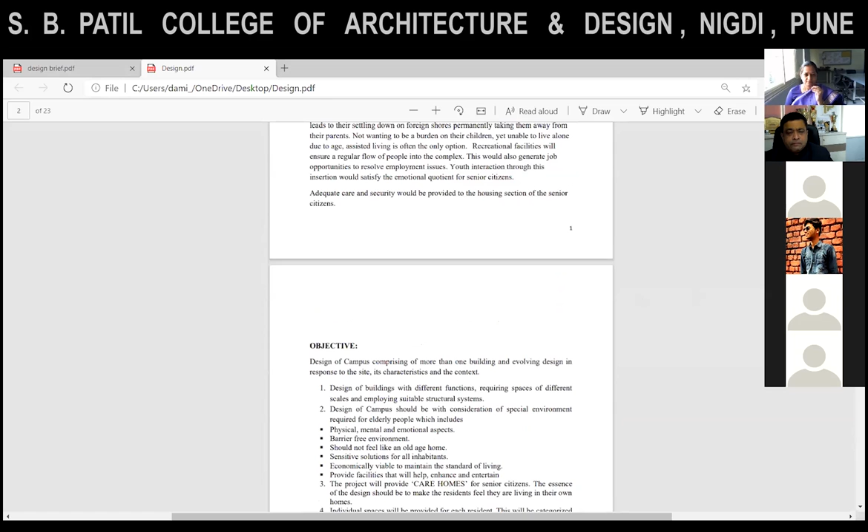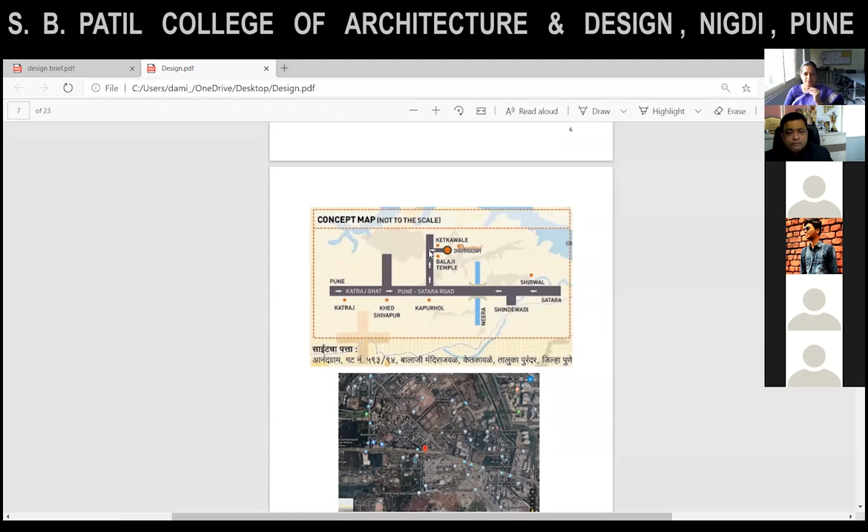Hello, good morning, Radhika ma'am. So I'm Damini from fourth year B section. I would like to present the current design project that we are working on. Our topic is assisted community living. For our site, we've been given a site in Ketkawale, which is approximately an hour from Pune. The site is a very secluded area, it is pretty calm, it is near the Pune Satara road, and there is an off lane which takes you to the main site.

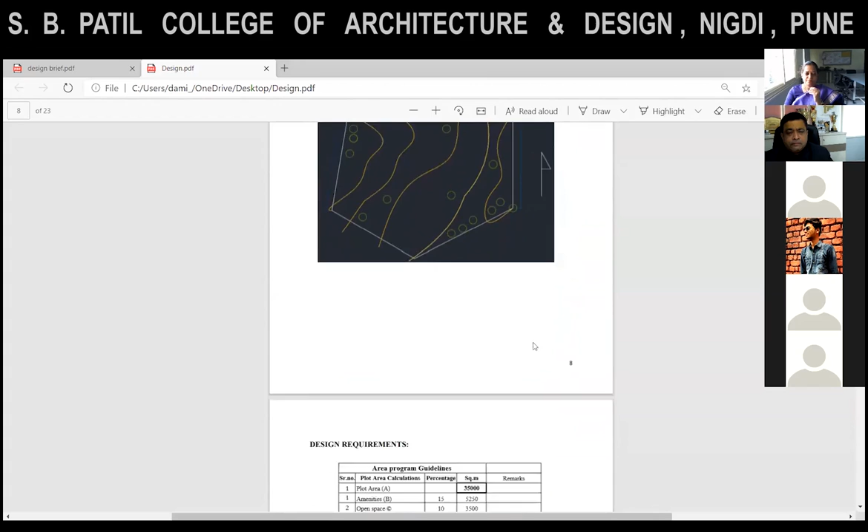This is the main site which we were given. It is a contoured site, and there is existing vegetation of mango and banyan trees on the site. These are the design requirements that we were given. We have been given building typologies of detached row houses and apartments of 1 BHK, 2 BHK, 3, 4, and 5. Along with that, we are supposed to give commercial spaces of shops and offices, and an amenity space of 5,250.

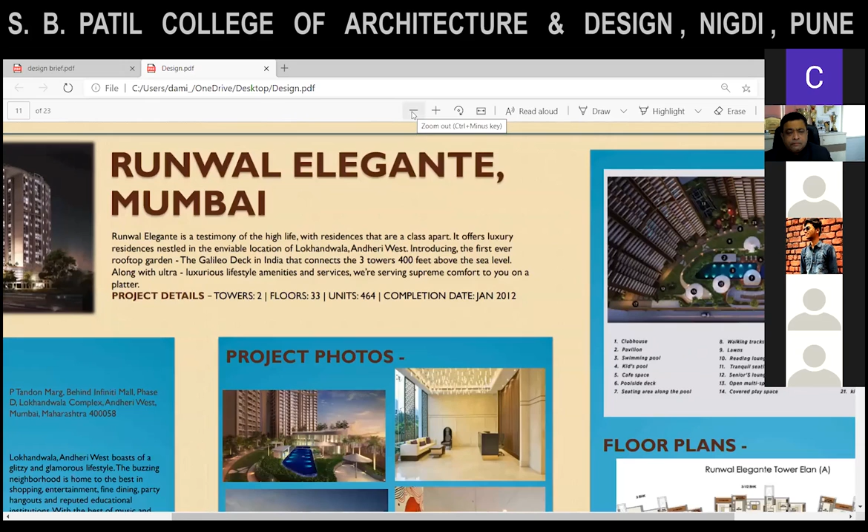Ma'am, I'd like to start with my case studies that we did. So the first case study that I did was on Runwal Elegante in Mumbai. So the location is Lokhandwala, Andheri. So the area of this site is pretty posh, but at the same time, it needs to be a little cost effective. So this building, the reason I selected it is because I am from Mumbai and I've always seen this building, and I wanted to do a deeper study in this building.

So one feature that I always liked about this building is that they have provided a Galileo deck sort of a thing which connects all three buildings on the terrace, and they have given the clubhouses and amenity space right at the center. The building orientation is such that the direct sun rays do not enter the playground, so that when children are utilizing the space, they are not hit by the harsh sun rays. The building leaves a shadow.

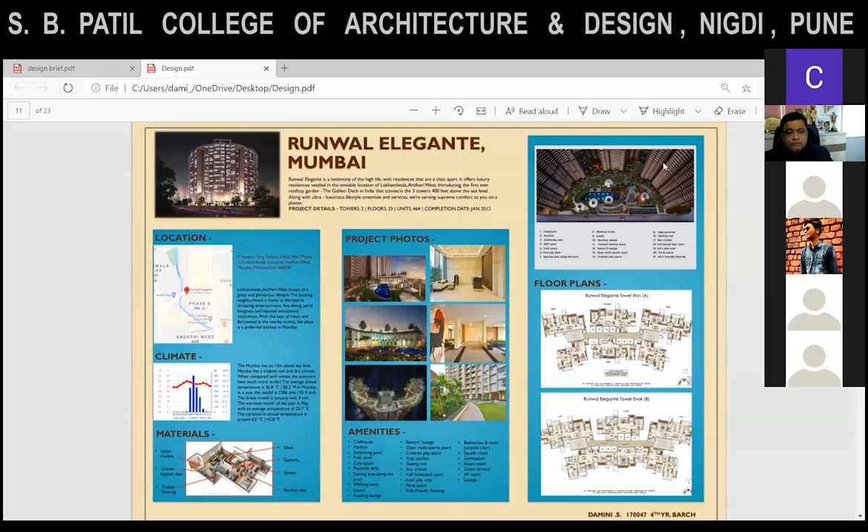So these are the plans that I have provided. They have luxury apartments of 1 BHK, 2 BHK, 3 BHK, 4.5 BHKs, and 5 BHKs. These are the plans that I have provided.

Then there was a second case study that I did, which was Sky Green Residential and Retail Tower, which is in Taichung City in Taiwan. This is more biophilic and green architecture, which is the reason why I selected it, because for my project I wanted to do something which incorporates the environment, the site context of our site. In this building they have provided a common terrace on alternate floors, and if you can see this image.

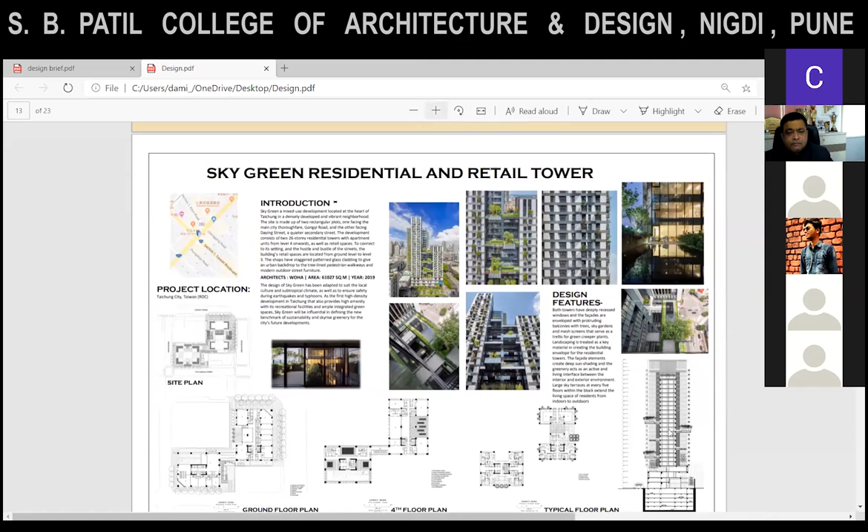Yes, go ahead. Yes, ma'am.

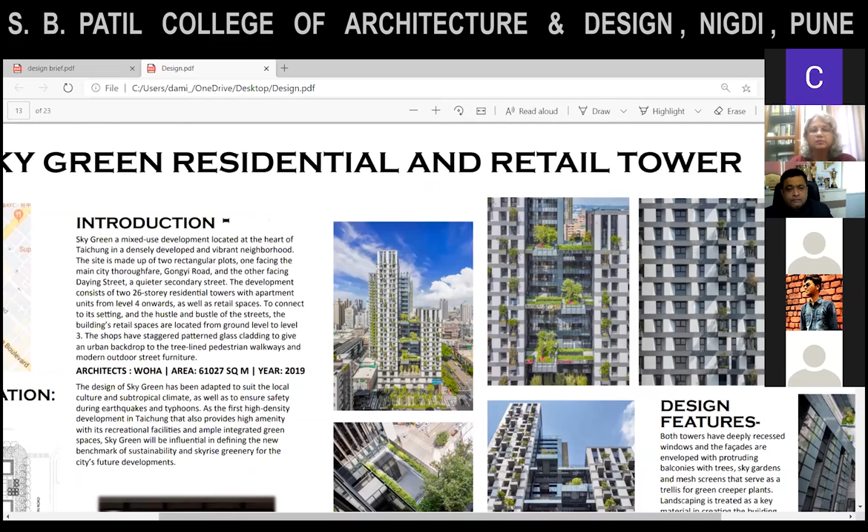And they have given a terrace with individual balconies, in which also there is plantation and landscaping done. And for the sun rays, they have done an elevation treatment, which is seen over here, so that the sun rays do not enter the building directly.

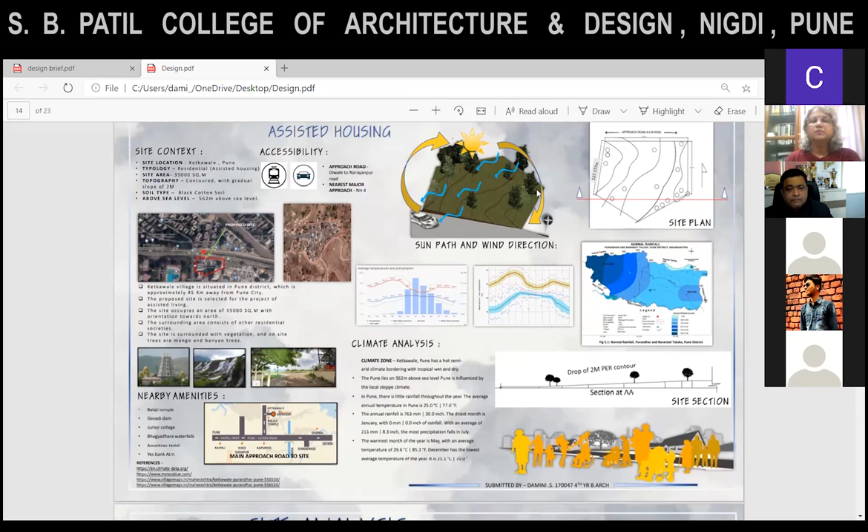Then the site has a contour from west to east. These are the images that I have provided. So this is our site, and these are the nearby amenities with approx locations from the site. And you can see that you have the main views in the north-east and south-west locations of the site, and this is the entire mountain region that is covering the site. So the site has a lot of potential for great views.

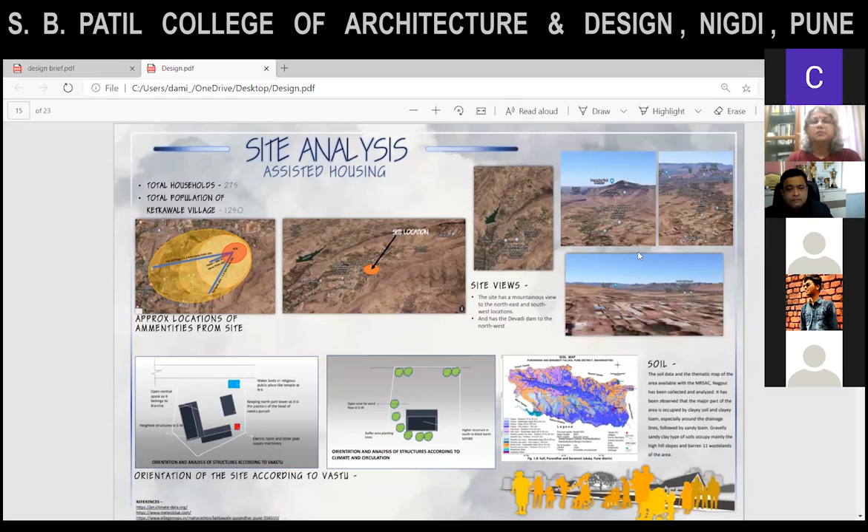This is the site. We have done an orientation according to Vastu. So the main buildings are placed in the southwest area, but keeping a little bit part open in the southwest for the wind direction, for the wind to enter.

And so my concept was, since it is assisted living, I wanted to create interactive spaces for everybody living there, because in assisted living there are specially abled people, and their mindset is that even though they need assistance, they want to feel that they do not require any assistance. They try to do everything by themselves. So the design thought was that it should be compatible for all.

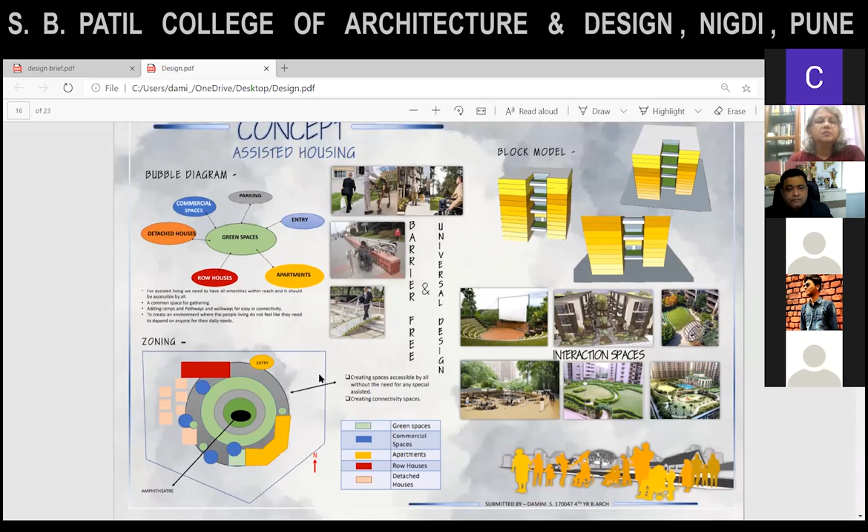Yes. So this is the basic bubble diagram that I had done. I have given the apartments on the lower portion of the contour, and then the detached and the row houses on the upper portion of the contour, so that the detached also can get the views. Then the zoning that I have done.

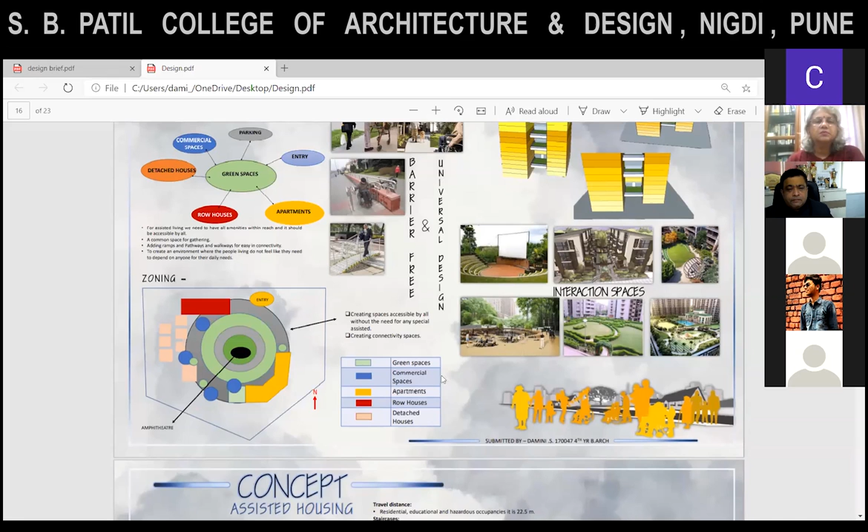So in the center, I have given the green space and the common interactive spaces, so that it can be accessible by everyone. And along with that, in assisted living for the specially abled, they do not have so many varieties of activities that they can do. So the spaces that I want to create would give them like an inspiration, like we can go and do this, so that is why I had created these spaces. So this is the DCR rules and norms that I had removed, and this is my area statement.

I have combined 1 BHK and 2 BHKs in one apartment in one building, and there are four types, and then 3 BHKs, 4 BHKs, and 5 BHKs in one building. Okay. Yes, ma'am. So there are total 6 buildings. There are total of 6 buildings, and we have a height restriction of 30 meters. So I've given 9 floors of 3-meter height.

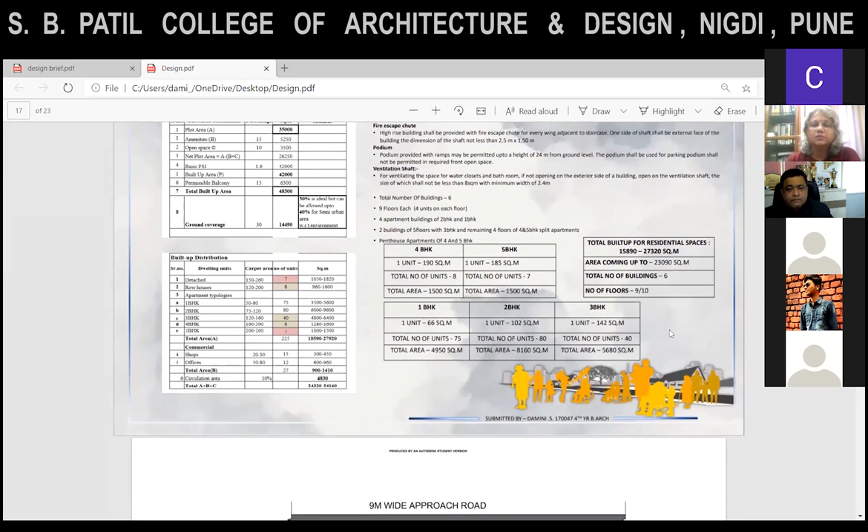Okay. Yes, ma'am. So this is my site plan. I've given an entry from the north side, and there's a separate entry for the apartments and for the detached and the row houses. I've given the road in the periphery of the site, so that anybody who is utilizing the spaces inside is not interrupted by the vehicular movement, and so that the entire circulation would be only pedestrian, and there is no risk or any scare for

the people utilizing it. So I've given the main open space or a garden sort of a place in the center. So it is accessible by everybody and it can be viewed by everybody. At the same time, this is at a height, and below this would be the basement parking for the buildings, which will be accessible from this area. So there is no vehicular movement on the site in the center.

And also I have... Okay, go ahead. Yes ma'am, also the vegetation which was on site, I have tried to not disturb that, so that is the reason why I have sort of given a setback.

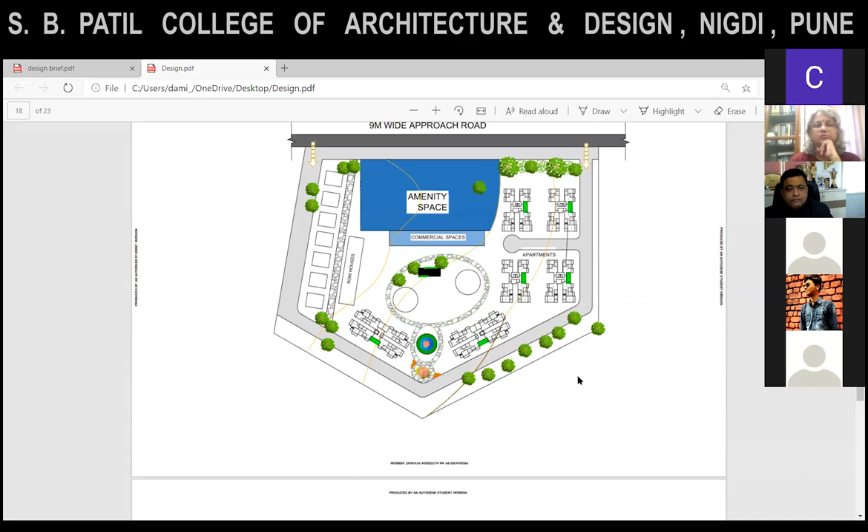Okay. Yes ma'am. So these are my floor plans. This is the row house floor plan. I've given an individual car park for each of the row houses, and the row house is G+1. So this is the main living entry. I've given the living space here so that it is a private space for anybody who wants to view the television. Then the kitchen is an open space, and then there's a guest room and the common toilet.

And then on the first floor, this is just a family gathering space, and there are 2 bedrooms on top, and this is the open terrace which will be provided. Okay. And then going ahead, this is my 1 BHK and 2 BHK floor plan. So these are the open terraces, common terraces that I have provided on each floor. These are the spaces where the people of the floor can come and just gather. This is something that I had taken from my case study.

So I've provided 3 lifts and the fire staircase and the staircase. For the 2 BHK planning, I've given the living space, the kitchen, common toilet, the bedroom and the master bedroom. For each room, I've given a balcony with a French window, which is going to be facing towards the views of the site.

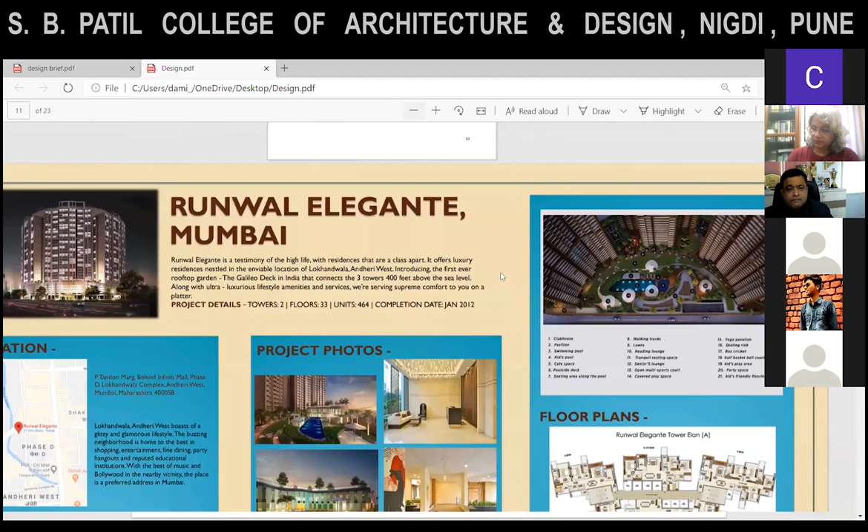Yes, ma'am, that's all. Okay. I have a few questions. Yes, ma'am. First, because I could not read your charts, what is the plot area and what is the FSI to be consumed? Yes, ma'am. The total plot area is 35,000 square meters. Okay. And the FSI that we've considered is 42,000, 1.6. 1.6? Okay, 1.6 times. Okay.

Have you checked whether you have consumed that much? Yes, ma'am, I have. So the permissible built-up area is 42,000, and so far I still have to work on it. My total built-up is coming to approximately 20,000. I still have to calculate for the detached because I've not completed that yet. Okay. So that is left.

Second question is, you have left 10% open space and 15% amenity. Yes, ma'am. Okay. Now my comments would be such that the 15% amenity is to be handed over to the government, right? Yes, government, ma'am.

The location of when you are doing the subdivision of the plot, see, in a large plot, whatever proposal we give, it is a subdivision of plot because you are dividing the plot into an amenity plot, an open space plot, and the remaining is the residential plot, correct? Yes, ma'am. So it is a subdivision.

So you should select an amenity plot or locate it in such a way that it gets maximum potential, but also see, from the road you are not able to see your buildings at all. So is it something that you want like that? Then it's fine. Otherwise, you have to consider that your residential project also gets prominence along with the amenity plot.

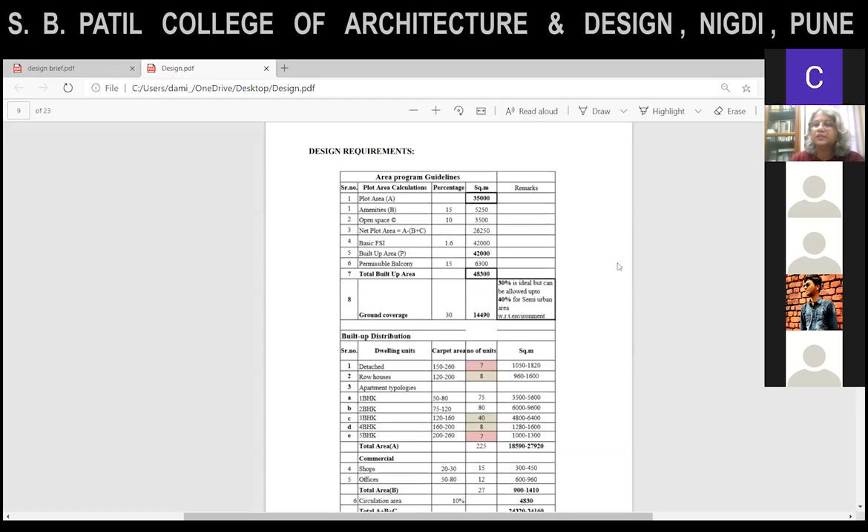Hello. Yes, ma'am. You can hear, no? Yes. Okay.

In this there isn't much of a passage which is wasted, but in the bigger apartments, as you go to 3-bedroom and 4-bedroom, you will realize that there are longer passages. So take care of that, because the second reason is the passages become dark. They don't get natural sunlight.

Now in this case on the right side you have the 2-bedroom apartment. In front of the door of the passage of the master bedroom, right exactly in front, if you put a window, maybe a smaller window, then if the door is open, at least you will get some cross ventilation. So over here, if you put a window, you will get some kind of light and cross ventilation. These are small things.

Secondly, have you checked the shaft sizes for light ventilation? Yes, ma'am. My shaft size is 1.5 by 2 meter. How much? It's 1.5 by 2 meter.

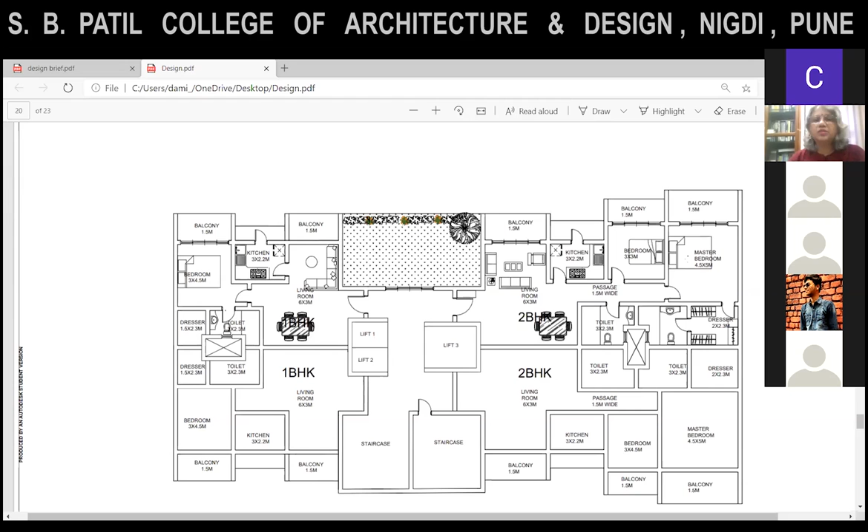And as I told you, you have not made use of the corners. And another apartment also I saw, in the 3 and 4 bedroom, the bigger apartment. Can you show that? This is 3. Yes, ma'am. So you can see that so much of the area is in the passage. So what happens is, when I'm buying an apartment, I'm paying for every square foot. So if you calculate this area, maybe you can get one more bedroom. Understood? Yes, ma'am.

So what am I paying for? Am I paying for the circulation area? So that's why you should avoid long passages. You can definitely reorganize this. Okay. Yes, ma'am. And see, there is a grid there. I can't see a clear grid.

In a basement, you need to have driveways within the building. So the drives are suitable sizes, and understand that you have RCC walls around the lift. These are walls which also can act as columns. Yes, ma'am. So you can take advantage of that.

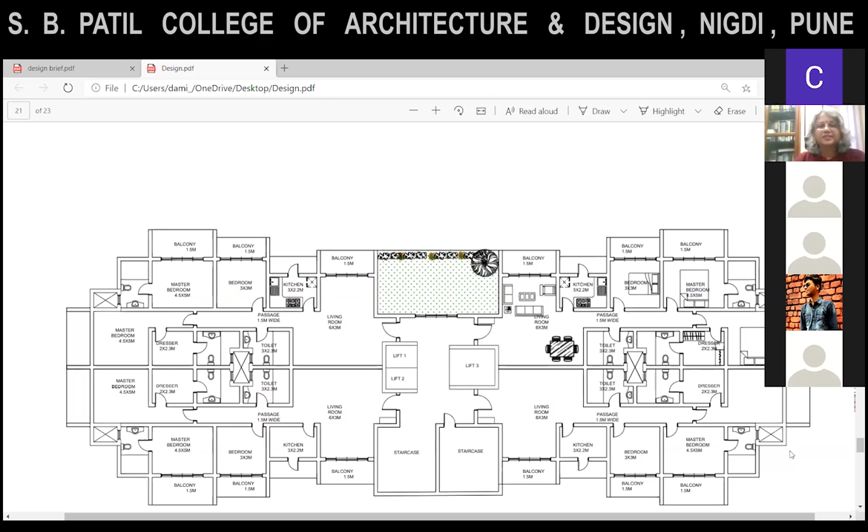Otherwise, it is a very good attempt, I would say, and I'd like to congratulate you for that. Thank you, ma'am. So the things which I appreciated was your thinking in the master layout, also the way you have put your driveway on the external side. There are some aspects which you will further work on, because you have yet to think about the services, the ramps and levels, because it's a sloping site. You have to work out the levels, and you must take advantage of the slope to work out the ramps. Yes, ma'am.

So you can also plan the entries. As I said, you have to plan whether every time a pedestrian would go to the basement and then take the lift, or if I can straight away enter the building from the garden at the ground level. So these kind of entries you have to work out. If I have to go to the garden, how do I get to the ground floor and go out into the garden? Or do I have to go to the basement, then go up the ramp and then enter the garden? So these kind of pedestrian entries are also important, right? Yes, ma'am.

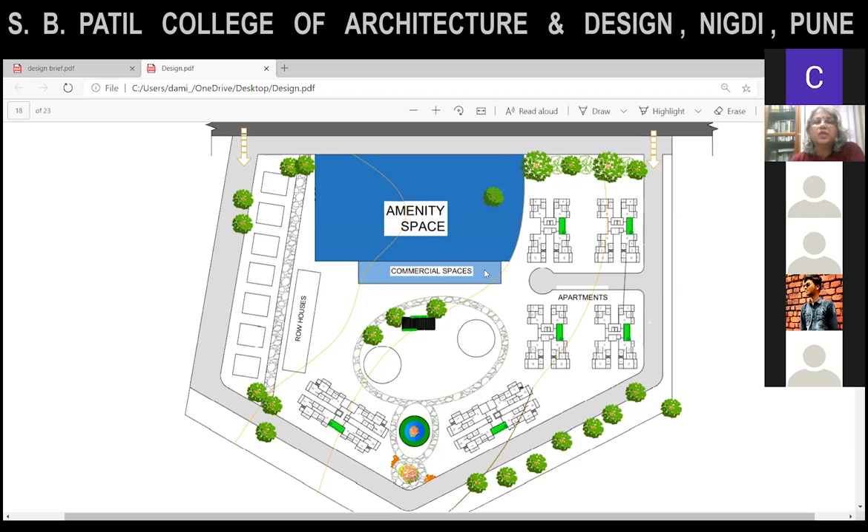You know. Yes, ma'am. And that is why actually I gave the amenity space connected to the main road so that it is not going to interrupt the internal layout. I understand, yes, but the commercial spaces should be available to these people as well as outside people, so that they get better business. They have to get business, and if I am the promoter and I have to sell these shops, it will be very difficult for me to sell these shops because they are not on the main road. You understand? Yes, yes, ma'am.

So shops are always fronting the road, the main road, so that these are available to the society as well as to the outside. So that is another point. Okay. Yes, ma'am. I'll work on all that.

In data collection, firstly, we have studied the typologies of houses, which are mainly row house, detached house, semi-detached, duplex, apartments, penthouse, traditional wada, skyscrapers, villa. And further, I have studied two case studies: one is Lodha Belmondo and second is Puneville, which is located at Pune. The reason behind choosing this case study is that I can easily relate it to our proposed site,

which is at Rawet, and the data analysis from this case study helped me in site context, and also brought me closer to the bylaws followed by the PCMC. Next.

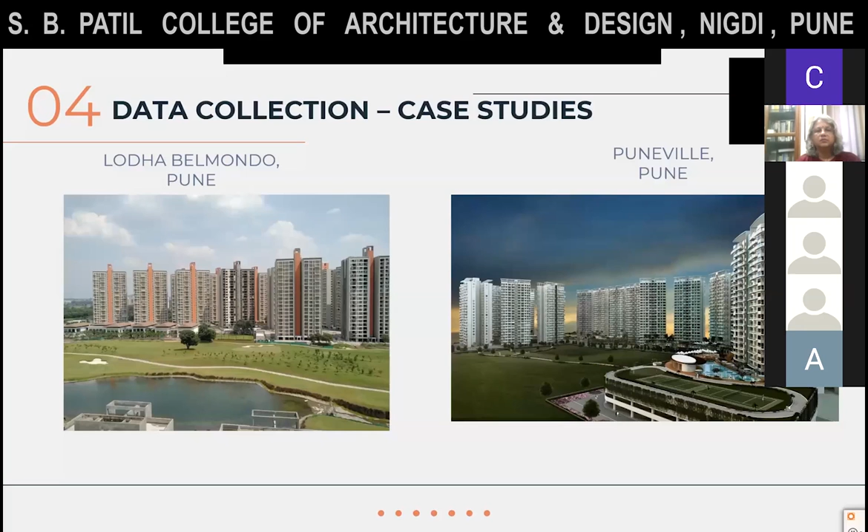Hello. Yes, yes, go ahead. Hello. Yes, yes, you are audible. Yes, ma'am.

Site analysis. As our site is located at the Mukai Chowk in Rawet, the actual owner of the site is Lalwani Builders, and the total site area is 30,000 square meters. According to the DP of Rawet, our site is currently situated in a residential zone, and it is surrounded by the commercial zone, giving an advantage of amenities such as hospital, market, restaurant, and bus terminal. As the site is also close to an IT hub, it has many advantages further.

Hello, Aniket. We can't hear you. Hello, ma'am. Earlier things we missed, whatever you said. Hello. Now you are audible. Yes, ma'am. Go ahead. Next. Hello. Yeah, go ahead. Ritesh, next. I have done.

So my concept is co-living, as our main aim was to design assisted living. So I have divided co-living in four categories, that is community, collaboration, convenience and COVID. As for community living, the basic definition of community living is people living together but in their private homes, or one can say a group of people living in private houses that are gathered together. In community living, I have considered all ages.

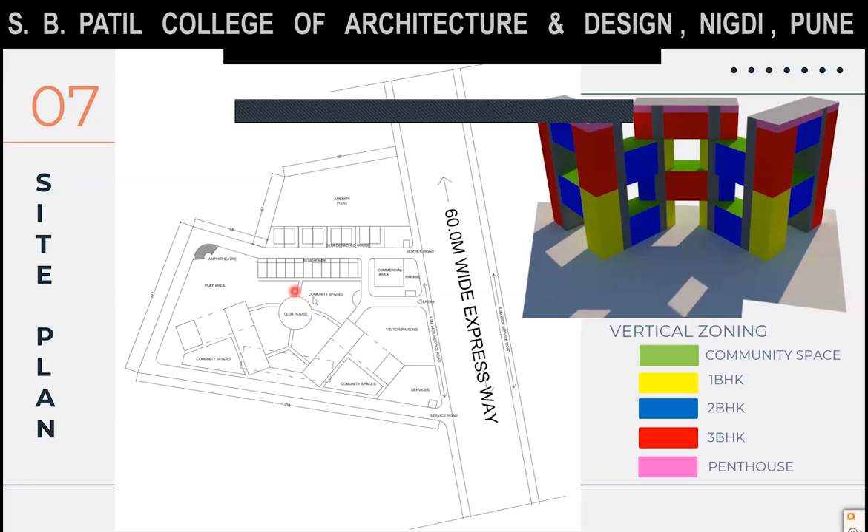Yeah, go ahead. Go ahead, Aniket. Hello, ma'am. Yeah. Hello. Yes, go ahead. Yeah, continue. Am I audible? Yes, yes, continue. Okay.

I have placed services at the end point, so they are easily accessible by others, and it will not disturb the internal layout. Further, at the front side is a 60-meter wide road, and all three sides are residential units. So in future there are chances of buildings and apartments. So I have tried to create more internal views rather than external. So if in future there is any high-rise building near our site, it will not

Aniket, you are not audible. Hello, Aniket. Hello ma'am. Hello. Continue. Yes, ma'am. Ritesh, next. Wait. Back. Site plan. Yes, ma'am. Hello, am I audible?

Ma'am, my work is pending for the penthouse, 3 BHK and 2 BHK for other levels. Yes, it is in process. So Aniket, I'll give you the comments. Can you hear me? Yes, ma'am. Okay, so in this plan also, I really like your effort because you've thought of something different than usual. You have designed the apartments also very nicely. The only thing is the core design, as I told you, you take care of the staircase.

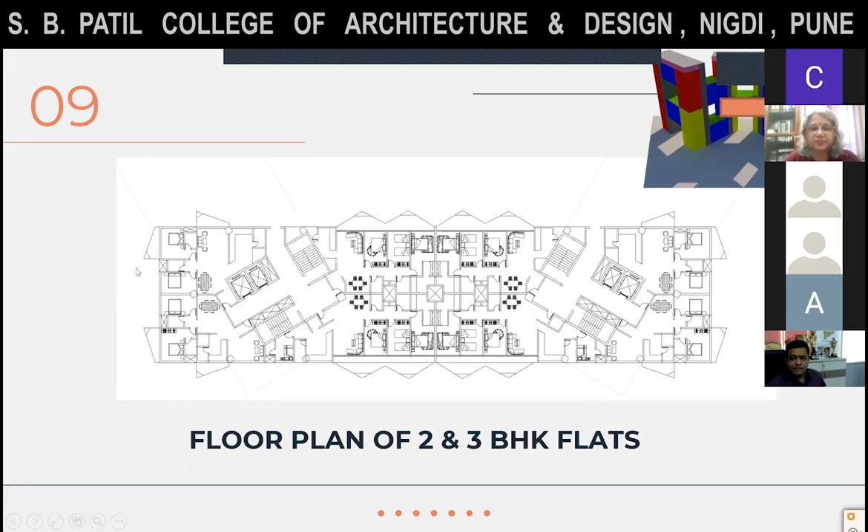Can you go to the layout? Which layout, ma'am? Your site plan. Site plan. Yes, ma'am. Okay. I want to appreciate your site plan because I think you have thought of different aspects in this. There is a clear cut circulation pattern for the vehicles and the pedestrian pathways. So I like that. Secondly, I like the way you have thought of vertical zoning.

Only thing is, I think your commercial area you have not detailed out whether you want it as a multi-storied building. Yes, ma'am. It will be G+2. At the ground floor, all shops will be there, and above 2 floors will be offices. But right now you don't have an idea how many shops you can accommodate in that. We have given a 10 shop requirement. So you don't know whether 10 shops will get the frontage of the road. So maybe some of the shops can face the internal road.

Because maybe all cannot face the 60 meters, the 12-meter road next to the expressway. There's a service road, right? Yes, ma'am. So some of them may face the service road and some of them may face your internal road. But ideally, we should think of shops which will have a good frontage. Yes, ma'am. You've also allocated an area for services. That is also something I like. So overall, I think your layout is pretty much worked out.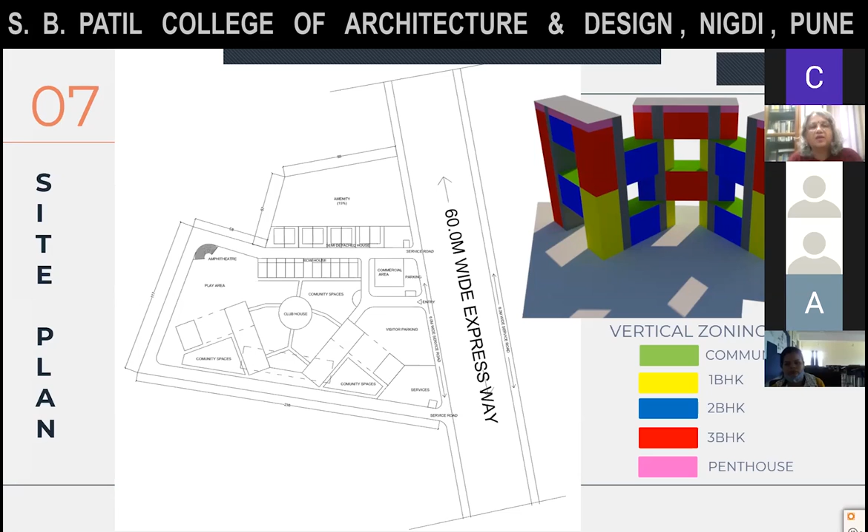Yeah, so the general comment I would like to give is that you have done good case studies, and basically the topic given to you is assisted housing, which does not mean that people staying there are dependent on anybody. In fact, we want them to be as independent as possible, and that is the way you have to go ahead. I'll just start with my presentation so that during the question answers, you can ask me more questions about anything specific. Yes, madam. Okay.

Yeah, can you see the screen? Yes, ma'am, but not the presentation. You can't see the presentation? No, we can't. Only the screen sharing is there, but the presentation is not visible. Okay. Now? Not yet. Give me a minute.

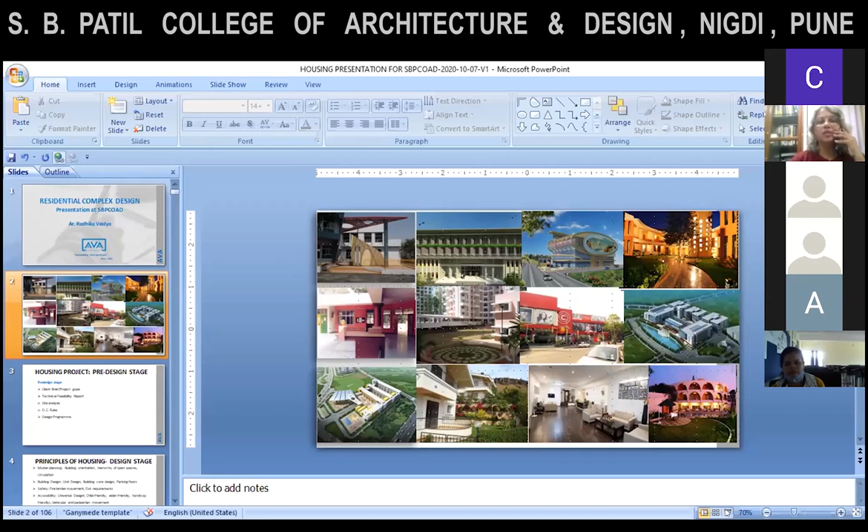Yes, ma'am. Now it is visible. Hello? It is visible. No problem. Hello? Your presentation is visible. Can you hear me? Okay, wait here. Hello, can you hear me? Yes, ma'am. We can hear. Akshata ma'am, are you able to hear me? You are able to hear me? Yes, madam. Okay, thank you so much. Sorry for the break. No problem. Okay.

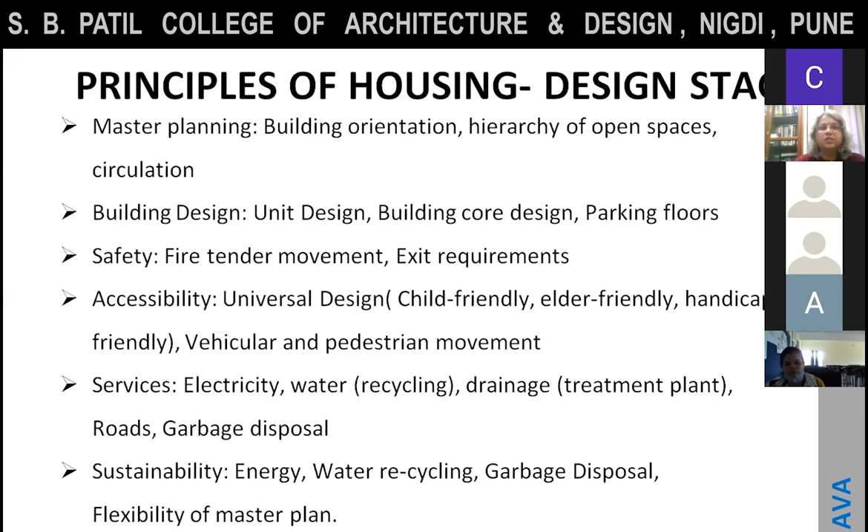So what is a sustainable project? I would say either the 3 E's or the 3 P's. So environment or the planet, you have to cater to. Equity or people means, as I said, if it is people oriented, child friendly, elder friendly, your project is designed considering people of all ages, then you have achieved equity for the people. And thirdly, economy.

That is, it should be an economical project, or it should bring prosperity to the project proponent or the builder or proprietor, as well as the buyer. So from the buyer's point of view, if I have a resale value for my apartment, whether I'm going to stay there permanently or I'm buying it as an investment, it should fetch me good returns. So all these three aspects become very important while designing a residential complex.

So there are 9 projects which I'm going to share with you. I hope I have enough time because I have to cover many aspects in this. Yes, madam.

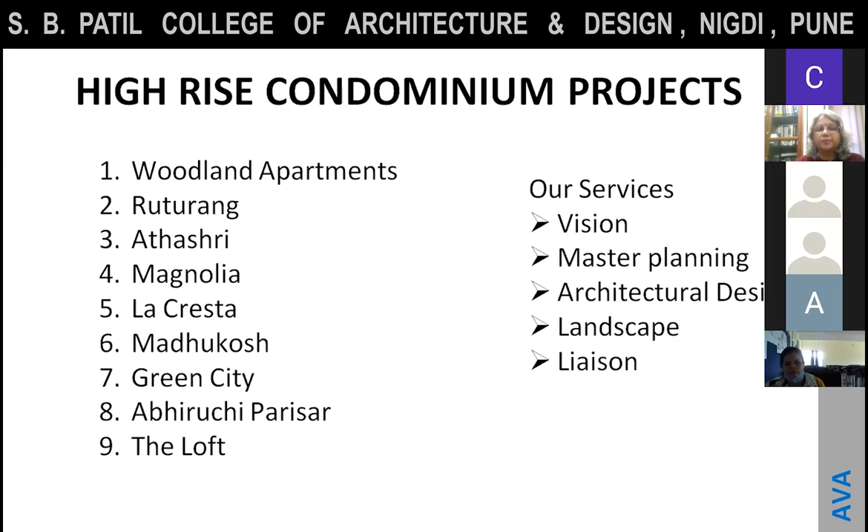So the first project is Woodland Apartments. This was, in fact, the first 36-meter tall building in Pune, when the DC rules had changed. Before this, the building height allowed was up to 20 meters. And when the Pune Corporation changed the DC rules and started allowing 36-meter buildings, this was one of the first buildings to get sanctioned.

So this is the Google plan of that. And why I have drawn this is, this actually comprises 2 separate plots which belong to 2 sisters. We had first got this plot in possession, and this was under negotiation. But we were still working out a master plan for the entire land. So we started with these 2 buildings.

This is located behind Cummins in the Kothrud area, and this was quite a secluded area. Now you can see so many buildings around, but at that time there was nothing in this area. So this plot we allocated for the commercial essential shopping and constructed these 2 buildings. At that point of time, the current rules of alternate level terraces were not there. So we played with the balconies, turning them at right angles at different floors to create an interesting elevation and to create terraces as well.

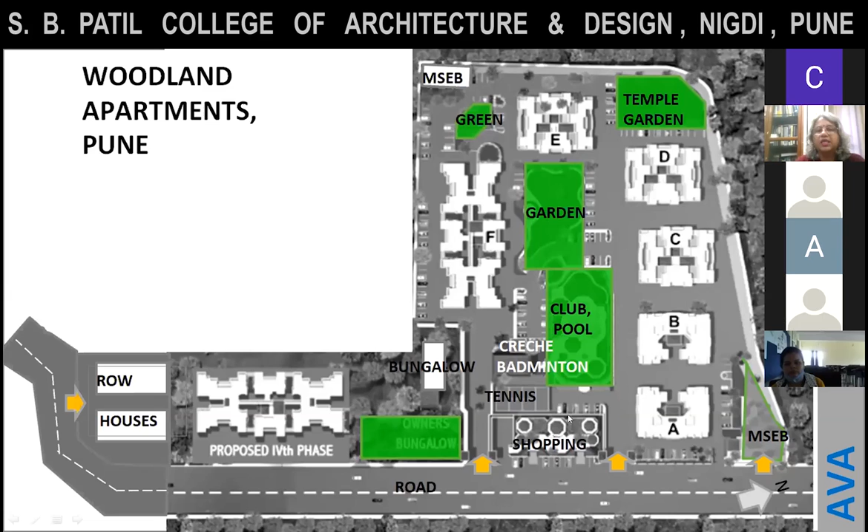The next one is Ruturang. So when this plot was bought, this was a proposed road, and we had to actually construct the access road before we got the completion of this project. In the meanwhile, during construction, we had this existing access to the project. And again, in this plot also, we had a number of trees. Maximum trees were in this part, so we decided to put the open space here so that we don't cut trees.

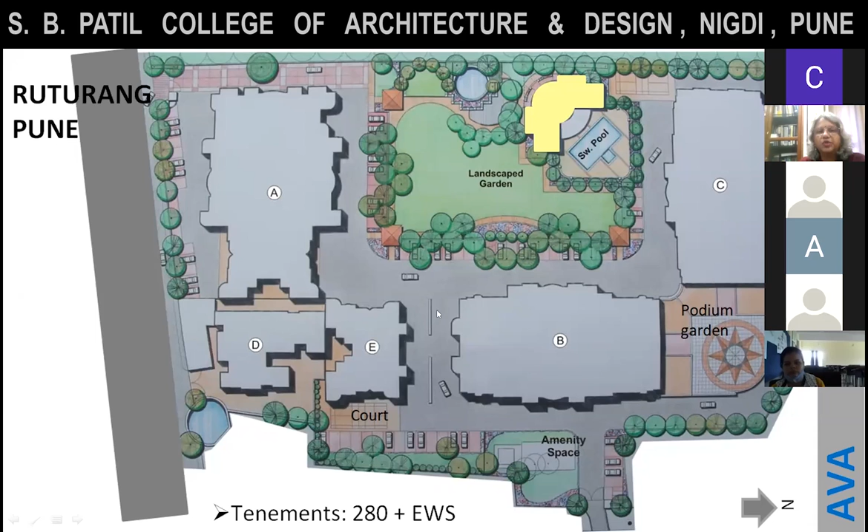After many years, we got an additional FSI. So we added a small building here with 2 apartments per floor. And each of these buildings have 8 apartments per floor. And you can see the core design in the center.

In those days, high rises or 36-meter buildings were new, and the rules for the fire norms were not clear, and only one staircase was required. Later on, the norms have been changed to 2 staircases per floor, with one staircase having an external side. Now here you can see this staircase is inside, but it has a proper big duct ventilating it. So even if the second staircase is inside, it has to be properly ventilated.

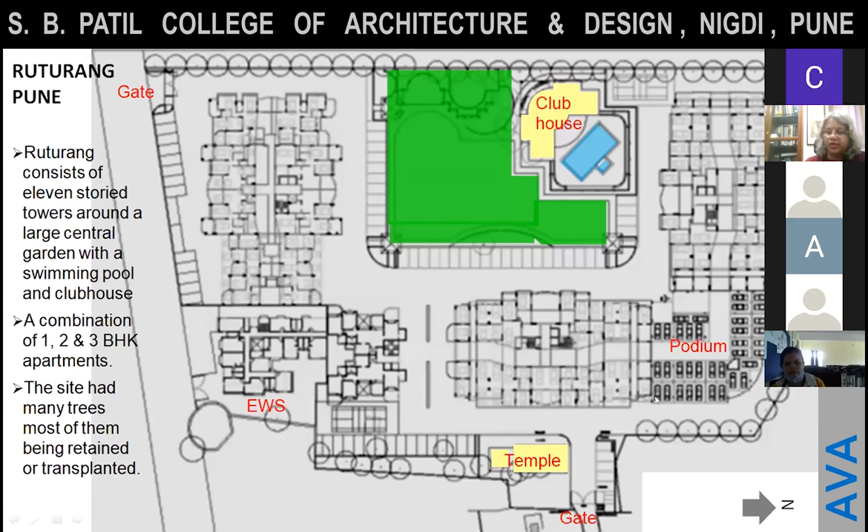The third one is Athashri Senior Housing. We have done 6 projects exclusively for seniors. The first one was built at Pashan, so I'm showing you this one, which was completed in 2002. So it's been quite a long time back. At that point of time, this was a new concept, and the promoter was not sure whether it would be a success. And there was no precedent. We did not have any case studies to do.

So we had to do our own research as to what are the requirements for such a kind of a complex in India. And there were mainly 3 points which we considered. It has to be obviously senior friendly, that is, we have to have accessibility as the main design component. It should be socially sustainable in the sense it has to have a sense of community living, because many times we see advertisements about residential complexes saying that you have maximum privacy to the apartments, and that is a selling point or the USP of the project.

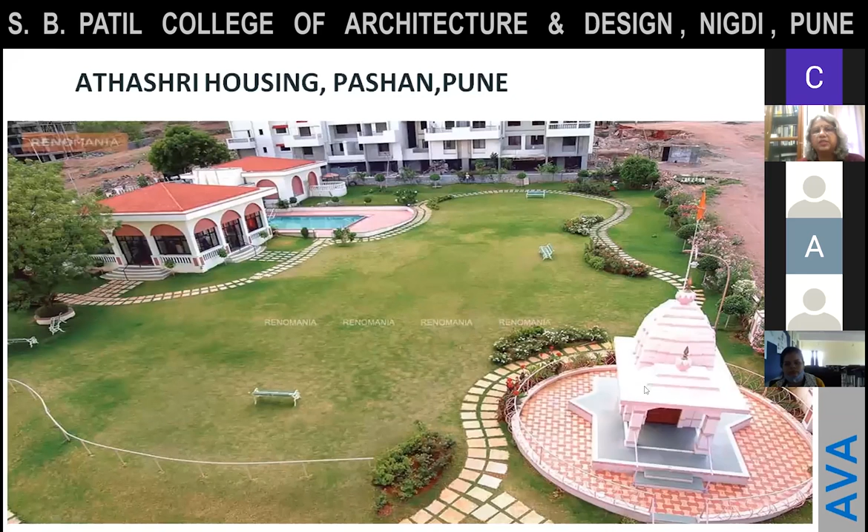We have also landscaped the terraces, and all the lifts go up to the terraces. So the seniors can go up to the terrace, sit quietly by themselves, or they have small group parties over here. We also have provided a dining space over there for them, which I have not included in this, but I wanted to stress on the outdoor interaction spaces because that is the need of the hour now.

So how you design the landscape and how you create a hierarchy of open space for different purposes is important. So here you can see a courtyard, smaller courtyard. Here you can see a place for chit chat in the outdoor open space. Then we also provide small children parks because when the grandchildren visit them, they can enjoy with them. Here you can see how the outdoor space is being enjoyed by the seniors. They are celebrating various festivals.

So this is the amphitheater which I was talking about. Of course, in the pandemic times, we can't sit so close to each other. So it will be half capacity probably. But you can see that it has ramps. So anyone can easily take the ramp, and there are no steps provided. So at every level, horizontally or vertically, everywhere, each space is accessible to each and every person staying in the complex.

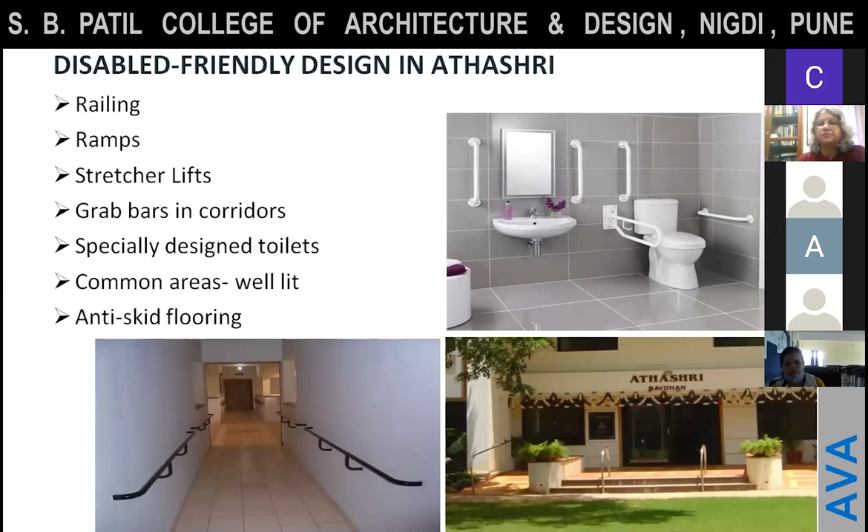The next one is Magnolia. I'm showing you different sort of plots, shapes and sizes so that you can understand how the site conditions affect the master plan. So this is the shape of the plot. So what we did was we put a commercial building here, which is now being designed as a mall. The construction has started now, but we had completed the residential part 10 years back. Now because of the squarish plot, we designed buildings like this.

Again, this has a slope, so we used that to put the ramps on the periphery, and this is a pedestrian area completely. Now the cores are so designed that from the building you can enter the garden through a ramp. So any person on a wheelchair can enter the garden very easily without crossing the vehicular movement. This podium is connected, and we have put the swimming pool on top of the podium here.

This is the clubhouse, and the garden is designed as there is a children's area, there is a senior citizens corner over here, and obviously this is the stage, and this part becomes like an open air amphitheater. So we are catering to different age groups as far as possible. We do that in every project.

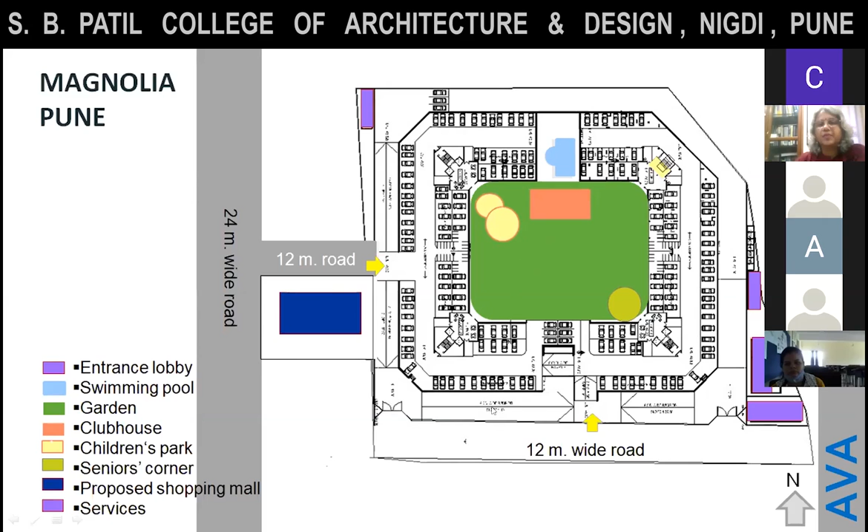This is a building design tip. One building I have shown, and as you can see, those days 2 staircases were not compulsory in the DC rules, so we have provided 1 staircase. And these are the 3-bedroom apartments. These are 2-bedroom apartments. As you can see, the corner bedrooms have alternate terraces, and you have alternate terraces for the living dining also.

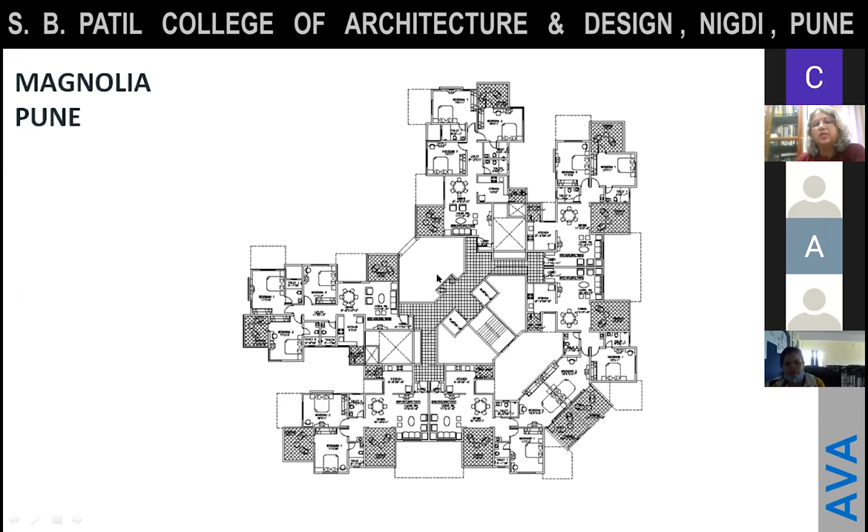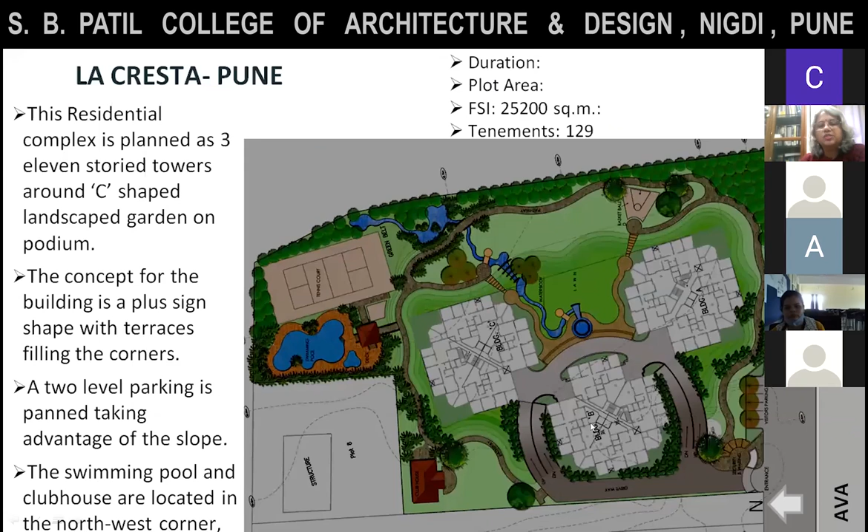So this part is a podium garden, and we have a clubhouse here with a small garden and some outdoor play areas here. So this was the initial visualization of the project, and these are the actual photographs. This garden is on the podium.

This is the podium garden, and we have provided these as ventilating shafts for the basement below. All these pathways are on top of the podium, so we had to design the slab accordingly with required sunks at the appropriate places, where the trees can be placed on top of the slab.

This is the entrance gate. And again, here we have made use of the slopes to create this basement. So we have a basement and we have a stilt. So we have again a 2-level parking, but the stilt parking does not have a full slab like this one. You can see the ramps, one ramp going down and one ramp going up.

Next is Madhukosh. Again, here I want to highlight the way we designed the master plan. In this case, we had this plot in hand, and this plot we were still negotiating. Means the builder was negotiating, but as architects, we had to keep that in mind. So later on we amalgamated the two plots and created a bigger complex.

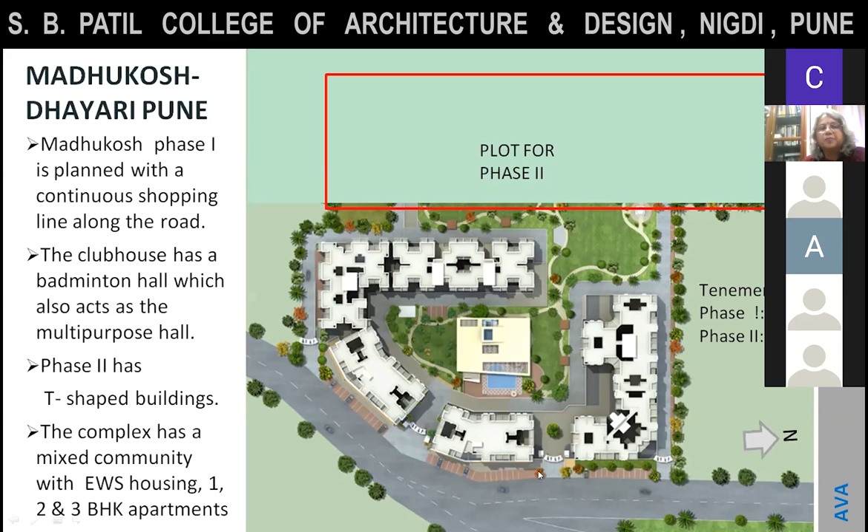We have a huge clubhouse in the center, and these are the open spaces that are proposed. Again, here we have 2-level parking, and we have very efficiently worked out the ramps over here. We have 2 gates, one here and one here, and this is an emergency gate, 3rd gate. Later on, when we bought this plot, these buildings were added. And this plot was given to the plot owners of the second plot. So we have built 6 twin houses here, means 3 pairs of twin houses.

So what I want to say is, when you're designing a complex, consider the saleability of each apartment, what kind of use the apartment has. Now this was designed with 6 apartments per floor, so that we get corner bedrooms for the maximum number of apartments. You know, the corner apartments can fetch a higher price than the ones in the center. So this is the way it is built. Sometimes this is quite dense. You feel it is dense, but when you go inside, because of the central open space, you don't feel that the density is high. So you can see these are visuals.

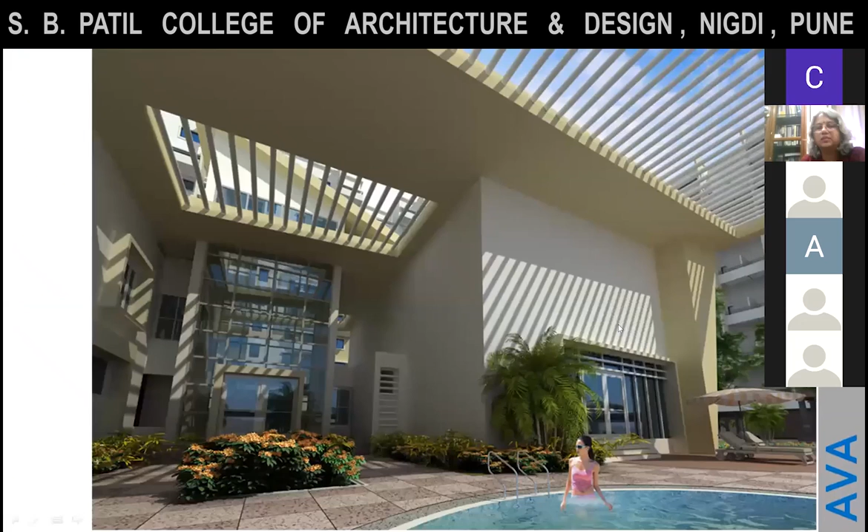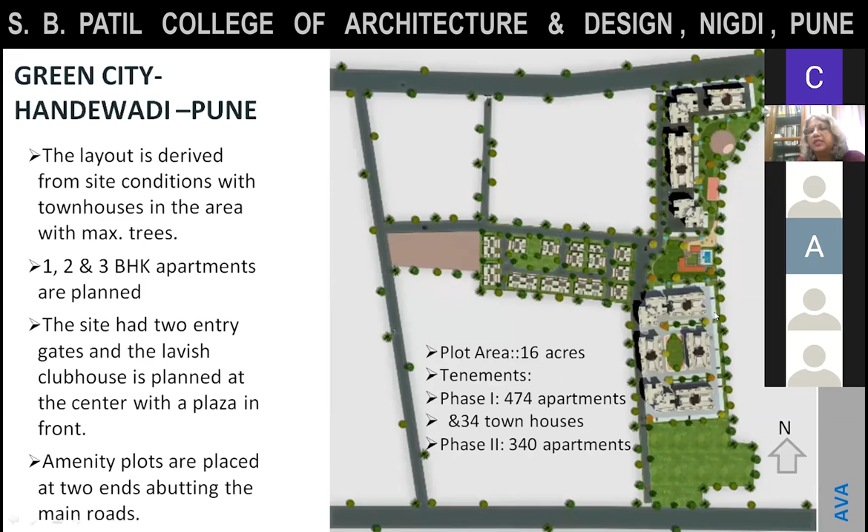And when you come here, you have a plaza and you have a central garden and a big clubhouse which caters to all these apartments. You can see that there are more than 700 apartments in total. So it is a big neighborhood, I would say. And we have put amenity plots over here and over here. So there are 2 amenity plots. Also, we have essential shopping in this building at the ground level. So it's a self-sufficient society by itself with its own recreational spaces, own essential shopping, own walkways, walking tracks, and a full-fledged clubhouse.

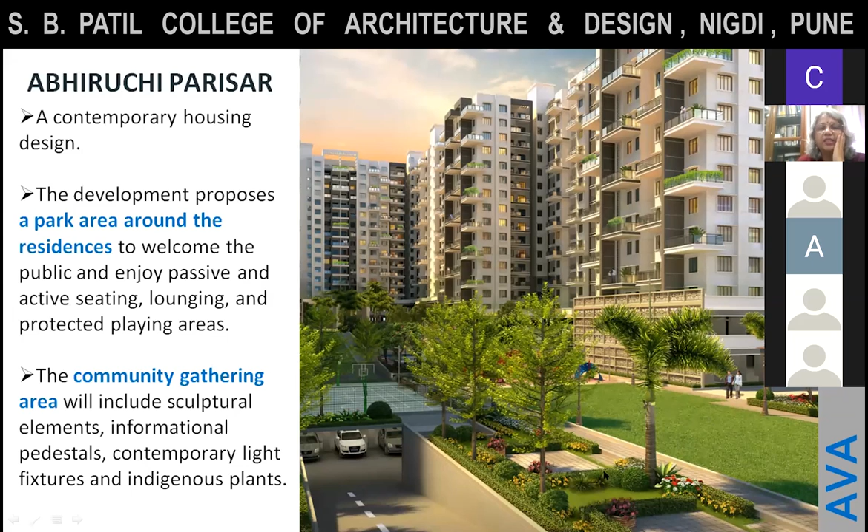And this is a very, very challenging project because it had a sloping site. And our main theme was we wanted to design it around a park, a continuous park or a continuous gathering space, and the buildings around it. So starting with the location and site,

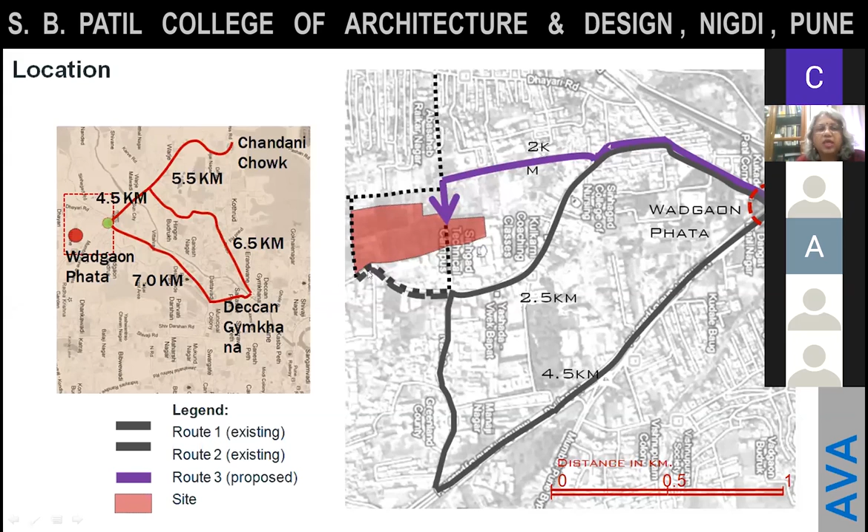Visioning. So we tried out various layouts in cluster formations; various possibilities were explored. We also explored the relationship of open spaces to the building and how it would work. And finally, with discussions with the promoters, we decided to go for option 1 and develop this one.

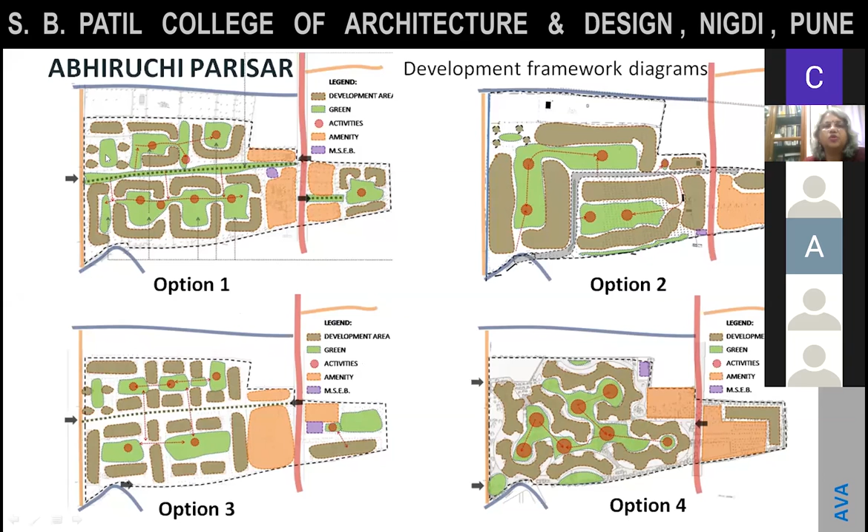So this was a proposed DP road. This was an existing road, and this was also a proposed DP road. So when we start construction, you start from this end, and we thought of this type of interlocking cluster type of development. And this part was to be allocated for MHADA, which means the social housing. 20% of the FSI was to be built and handed over to the Maharashtra Housing and Area Development Authority. So this plot we allocated for that.

Also, we have to give 15% amenities. Because there was a DP reservation here for a shopping complex, we thought that we should cluster all the amenity spaces around this road. So we have put the 15% amenities over here. You can see there are so many existing trees, so we allocated this plot to the owners and built around this.

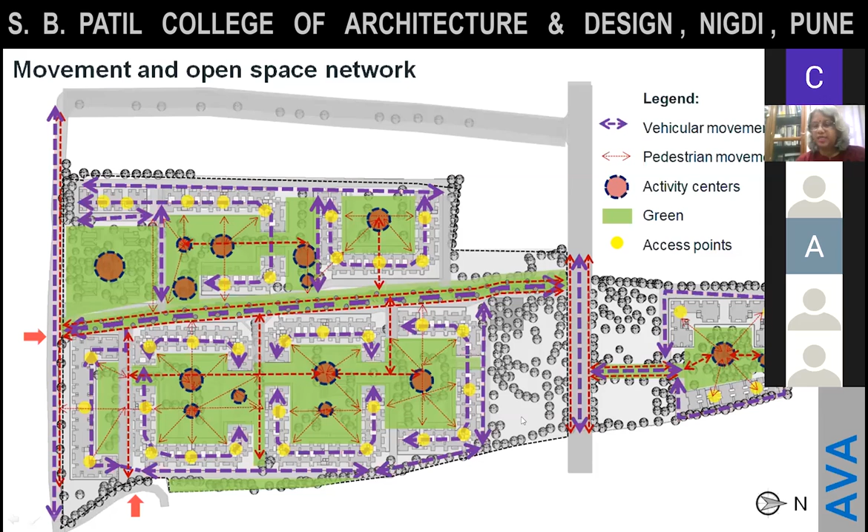Okay, so this was the initial conceptual movement and open space network that we worked out. Eventually, it evolved into a little bit different master plan that I will explain further. So here you can see we have accesses here, 1, 2, 3. This was proposed; whenever this would be constructed, this would be a 3rd access, and this access for the MHADA, and these are the amenities. Then this was the MSEB plot, which eventually shifted over here, but this was the initial one.

And as you can see, all the green areas we wanted connected. The initial idea was there was a row of trees here adjacent to the existing pathway, which we wanted to retain, but unfortunately later on we could not retain many of these trees. But that was the initial idea. And all these existing trees were to be retained.

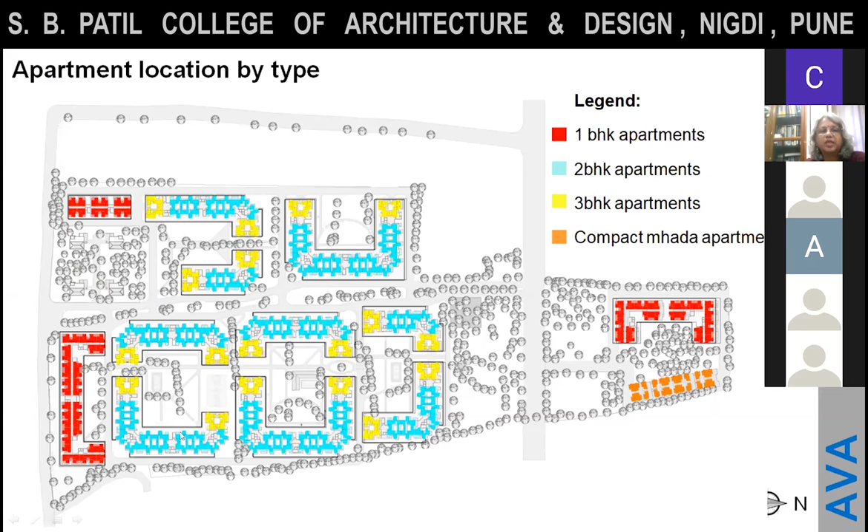Here you can see the typologies. So we had 1 BHK, 2 BHK, and 3 BHK apartments. Most of the 3 BHK apartments were put in the corner so that they could have a premium price. The 2 BHK apartments were in the middle of the buildings, and we proposed 2 clubhouses, one here and one over here for phase 1. So this was very, very initial, in 2014, what we had done.

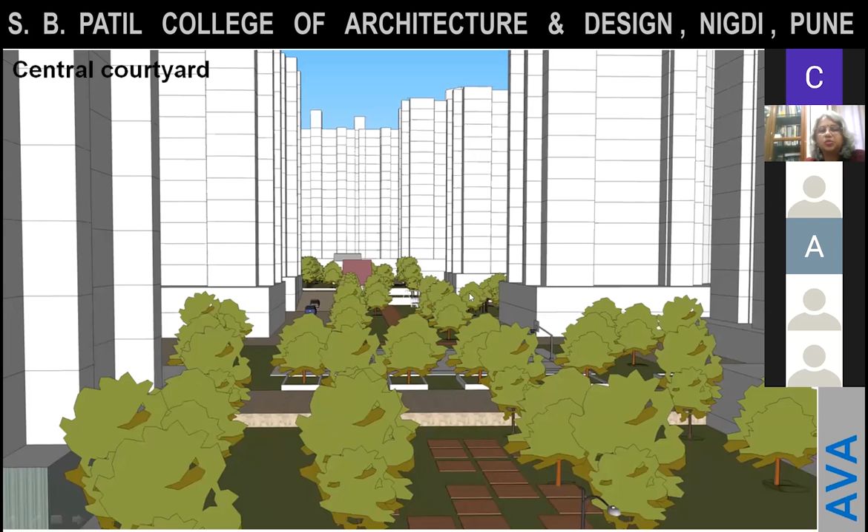This is 2020 now. So this was the kind of central park which we wanted. And we wanted to check whether the width of that would be sufficient, because the buildings were going to be 50 meters tall, since the FSI was very high, 2.2. So this was the 3D visualization for the brochure, and this was the central park which was visualized. One clubhouse over here with the swimming pool, and the second clubhouse in the next open space over here.

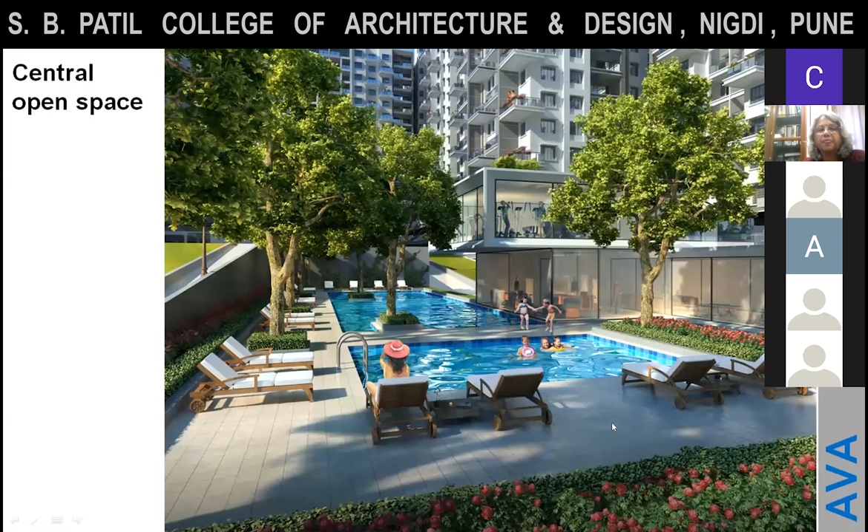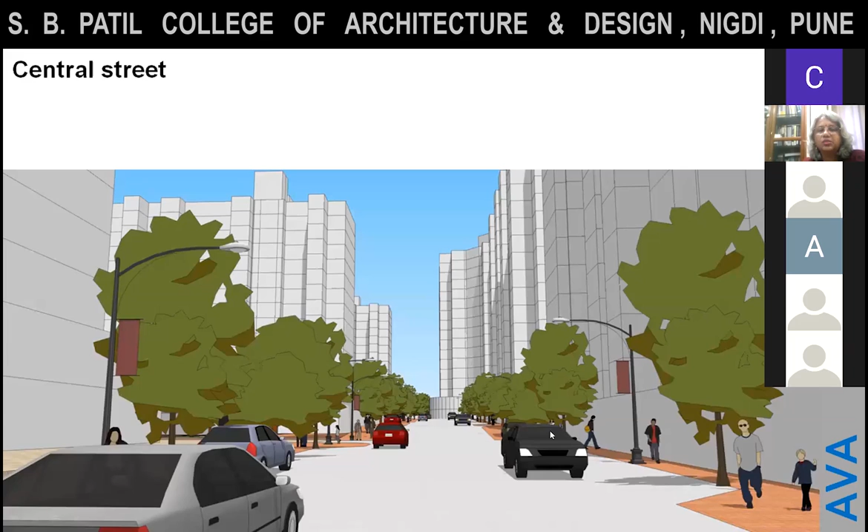This is the central street between the 2 rows of clusters. So this one. So we will have phase 2 over here, and this is the phase 1, and this is the central street which will lead to the road on the other side, leading to the Mhada complex. So we had designed where the parking would be, how the footpath would be, how the entries would be, and all the details of the street sections were worked out.

And here we had used the top terraces for farming. So we would have terrace farming over here for the seniors. That was the idea. And this is the Mhada component which we have designed, and these are the amenity areas. Here, because this was also a road, we have put essential shopping over here for the residents.

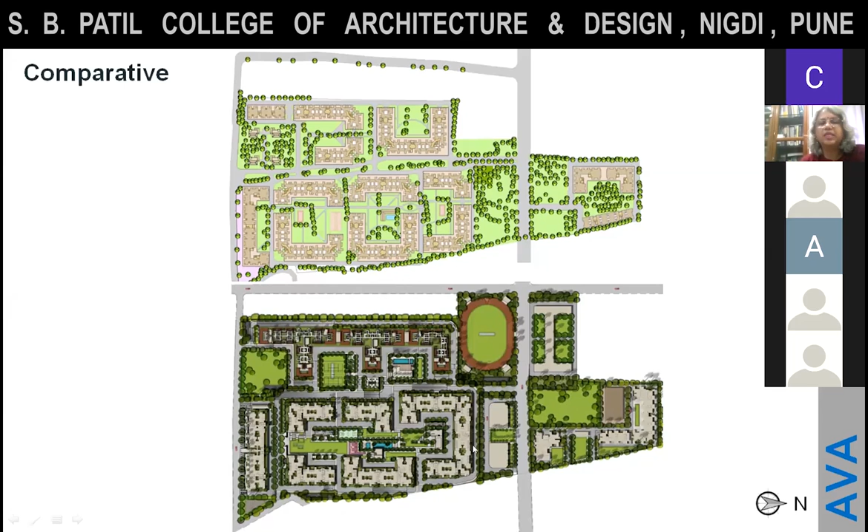Right now we have completed this building and this building, and we are in the process of changing the plans for the remaining buildings, as I told you, because the project started in 2014 and now 6 years later, the market trends are changing. So we may have to change this part of the layout. Keeping the master plan, not many changes in the master plan, but the building typology and the building design will be changed.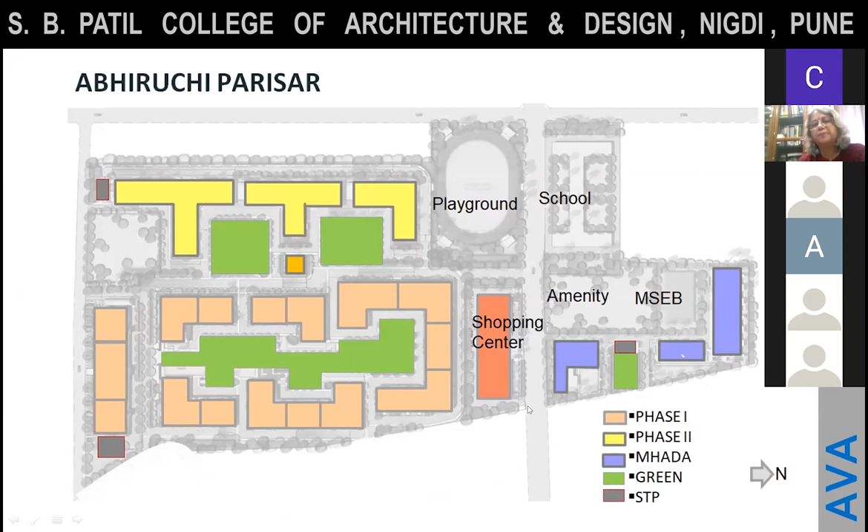Infrastructure. Now in infrastructure, the first thing is working out the parking. This was very challenging because the lowest point of the plot was at this corner, and this was the highest point, and because the slope was traversing in both directions, the difference from this point to this point was 4 meters, and from this point to this point it was 10 meters. So you can understand the level difference, and we had to negotiate the entries to the different parking levels.

So we have these sort of interlocking parkings worked out. So we have level 1 parking, level 2, then level 3, and then level 4, and the basements extending into the next cluster. So how to make use of a sloping site was something which we learned while designing this project.

Also the main service lines are to be worked out. So here you can see that the main service lines are marked out. Then the STP locations are marked out, one here for this cluster, one here for this cluster, and one here for this cluster. Again, the STP has to be at the lowest point, so accordingly we have allocated the spaces.

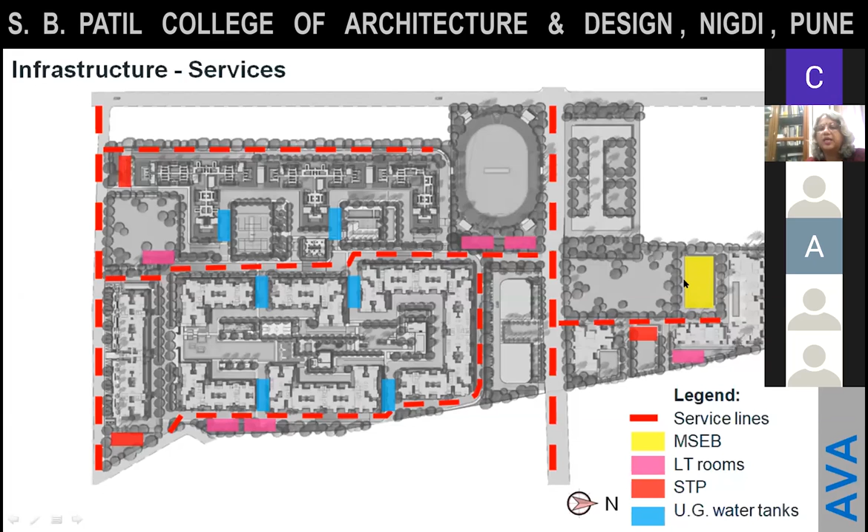And this is the MSEB yard, which we have handed over to the MSEB. Okay. Then streets: as I told you, the street sections are worked out in detail. Here you can see this is phase 1, this one. This is the phase 2 building. And you can see the distance between the two buildings, because there is an open space, there is a street and the open space. So the relationship between this building and this building is understood from this section.

A detailed section is made here, so these are the service lines below the paved area. This is a trimix part of the road, the vehicular driveway. This is where the services will go. This is the footpath. We have also marked out where the trees will be planted, and this is the footpath, and this is the entry to this building over here. So all the pedestrian entries, vehicular entries, etc. are worked out in detail. Whenever you do the master plan, you have to put down the levels, made up levels around the buildings.

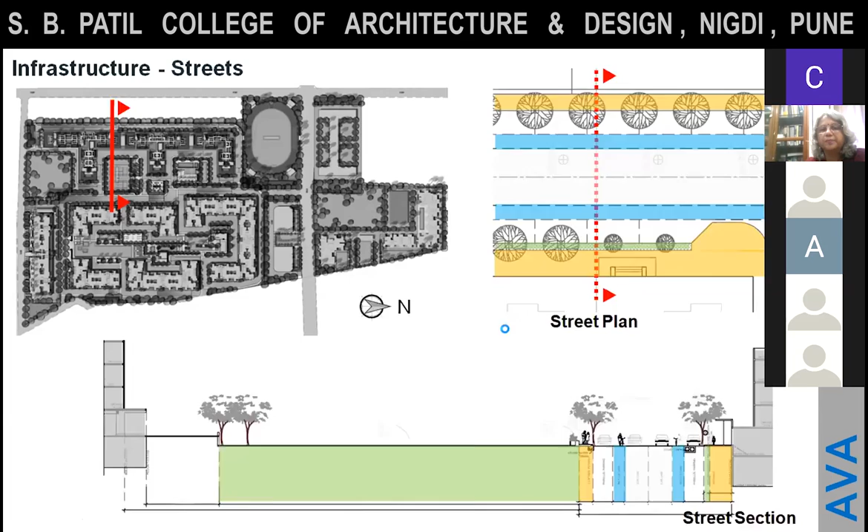This is another street section of this entrance street. Here we have building 1, and here is the second building. So the relationship between these two buildings can be gauged over here.

Building unit and unit configurations. So I'm giving an example of one building.

There is some problem with my mouse.

Okay. So this is one building. I'm going to explain how the core works. Although this podium is connected, these are actually two separate buildings above the podium. This building has 6 apartments at one level, and this building has 4 apartments at one level. These are 2-bedroom apartments. This is also a 2-bedroom. This is also a 2-bedroom, but the design is slightly different, so it is marked in a different color. And the corner ones are 3 bedrooms.

So this is how the core works. Initially, for this particular building, we had placed the core diagonally, but then we changed it to this so that the driveway is easily accommodated. So there is an internal driveway here which maximizes the parking. Okay. So here you can see the passage areas. You have to minimize the common passage areas, yet keep the entries and exits.

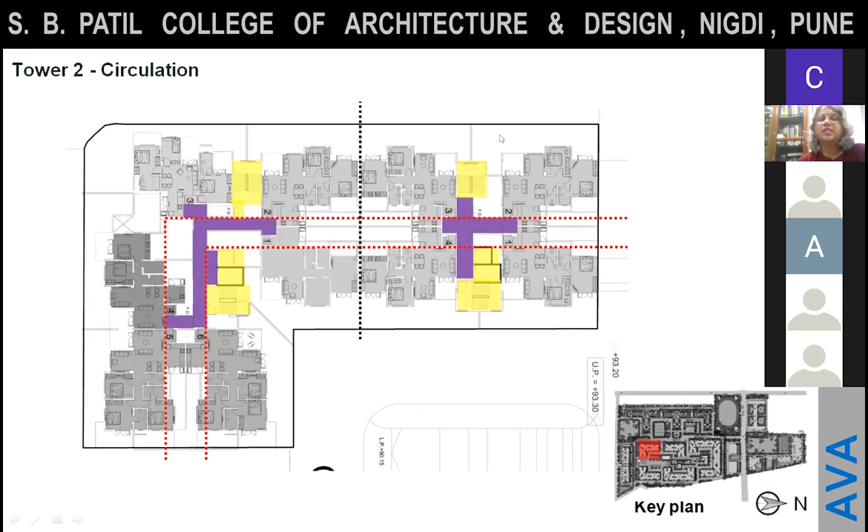Now from this staircase you can come out into the garden, and this is an external staircase which leads you to the street. So this is the fire staircase where you can come out from here. And these are the entrance lobbies at the entry level, the parking level.

Services. Here you can see that the fire ducts and the electrical ducts are marked. These are very important in vertical development, that you have sufficient electrical ducts, vertical ducts and fire ducts placed next to the fire escape staircases.

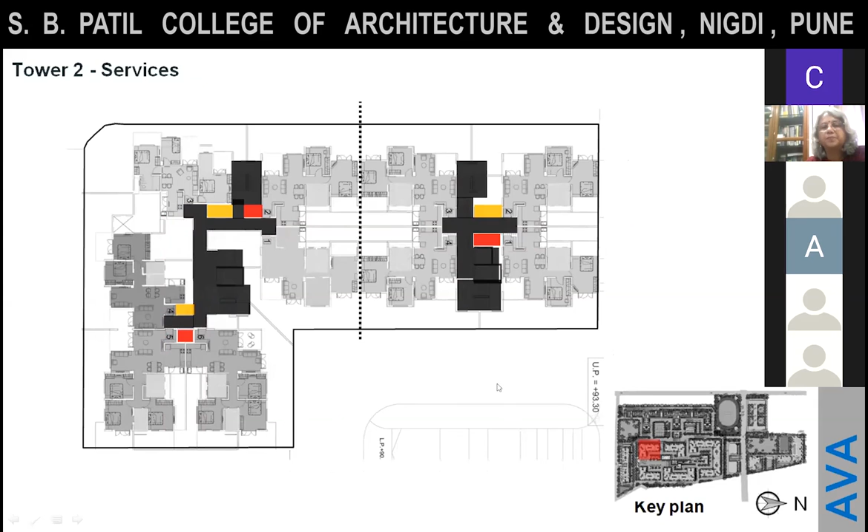So this is again the master plan. So we come to the end of Abhiruchi Parisar. The last one is the Lofts at Blueridge Township. I have taken this example because it is a 110-meter tall building, which is possible in a township. This is another township that we have done. Again, it is 160 acres, which also includes a 25-acre IT SEZ.

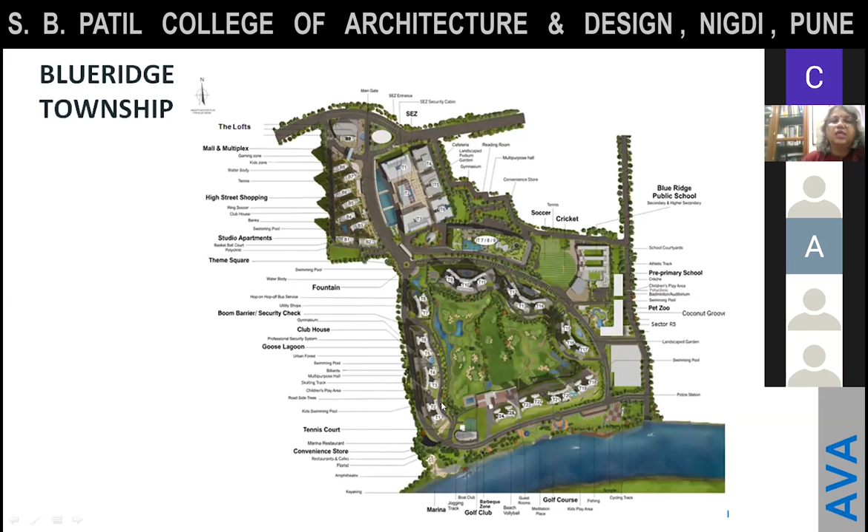These are the compact apartments over here, and these are the 2, 3, and 4 BHK apartments. There is a golf course in the center. And because this is the Mula River, the apartments have either the river view or the golf club view. All these apartments range from 26 floors to 30 floors. So this is the building that we are going to talk about now.

So I'm going to make it very, very brief because if I have to explain this building, it will take an independent lecture, but I'm going to explain it in 4 or 5 slides. Because we had roads on 2 sides, we have two gates, one over here, and the pedestrian entry to the mall from this side. This is the podium, and this is the tower placed on top of that.

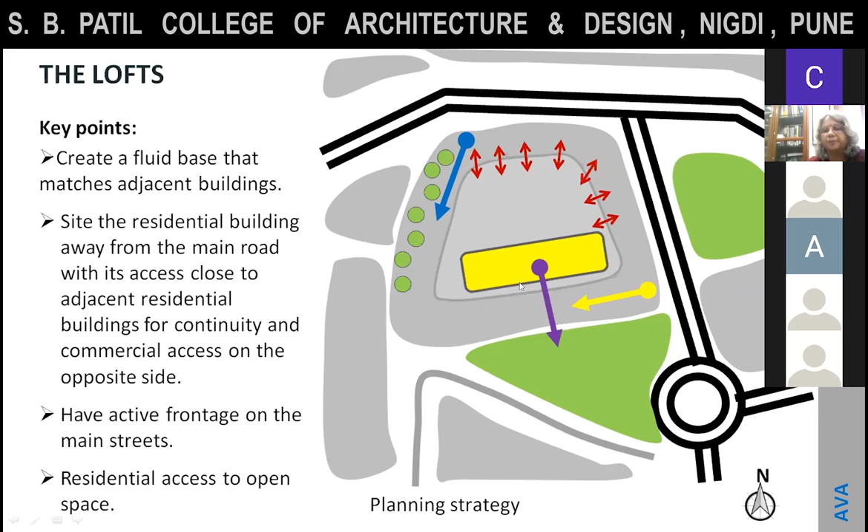We had to design parking in such a way that the commercial people have their own separate parking and the residential people have their own separate parking. So their exits had to be different. As you can see, this is the entry for the residential. This is the pedestrian entry to the mall, and this is the entry for the commercial parking.

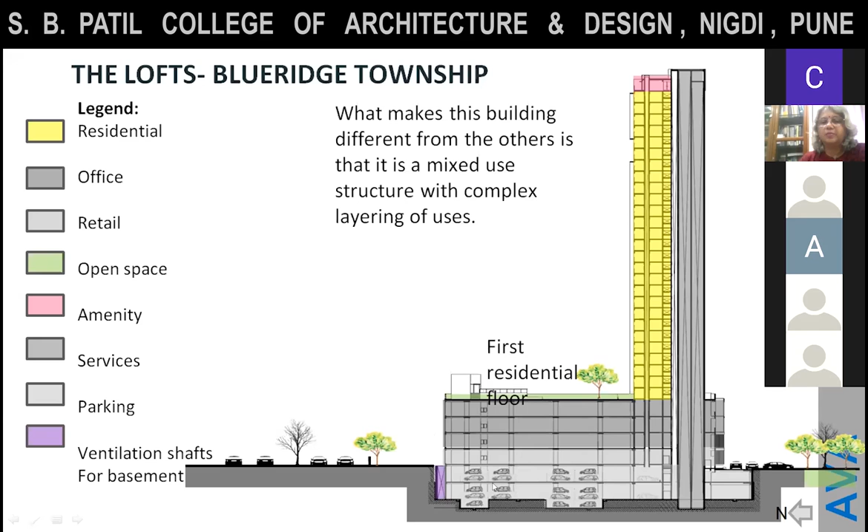We have created trenches like this, or ventilation shafts, to ventilate the basements. So even though we have a lot of commercial, our basements are naturally ventilated. So we don't have to put ducting in the basements to ventilate. As you can see in all the malls nowadays, they have ducting in the basements to ventilate them, but we have created natural ventilation. So a lot of effort goes into planning these details.

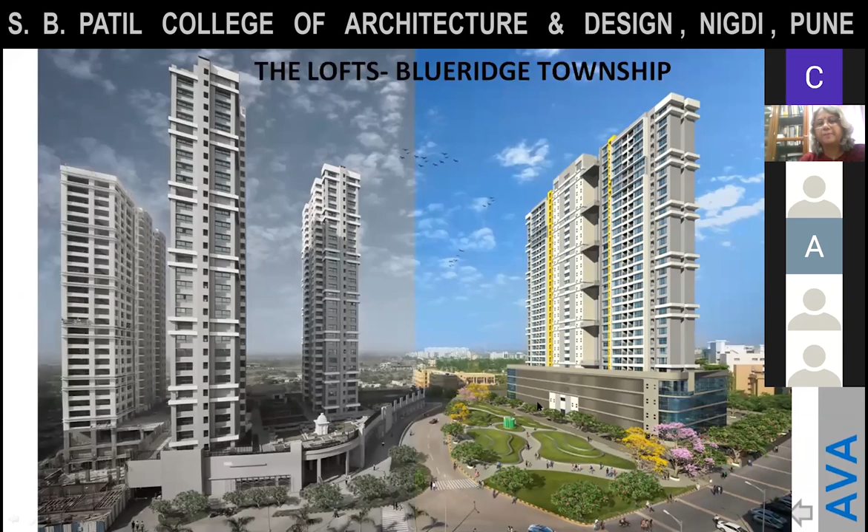For the commercial part and the podium part, we have used PT slabs. For the tower, we have used Mivan technology. And for the core, we have used conventional construction methodology. So there are 3 types of construction methodologies used in this. That is also what makes this building different or interesting.

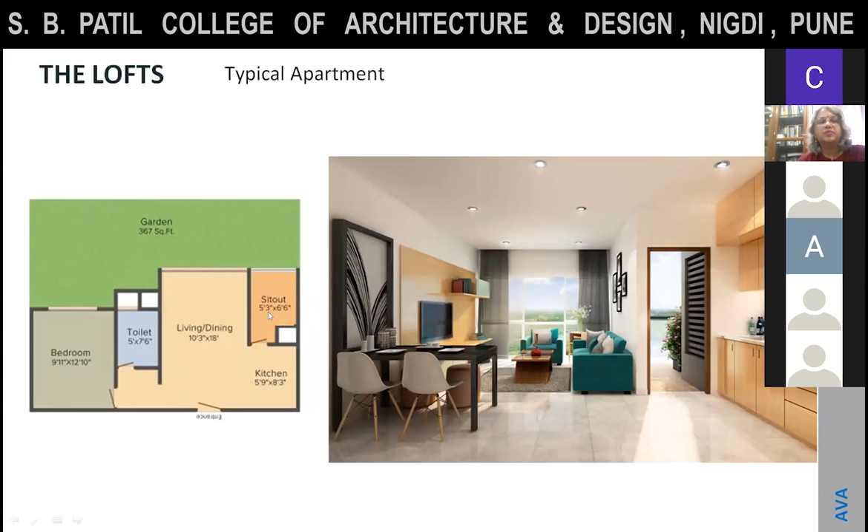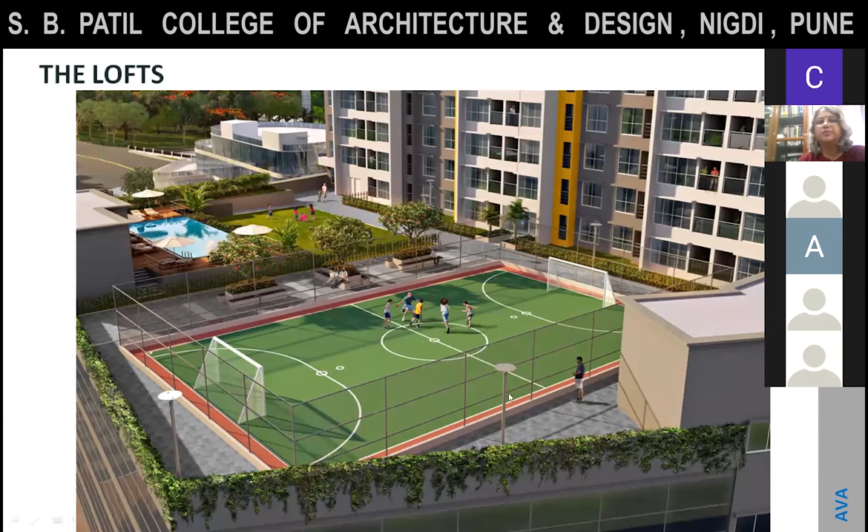This is the podium landscaping 3D view, another view of the podium. So you can see the swimming pool here and the futsal court over here. And this is where you enter the podium garden from. So that brings me to the end of my presentation.